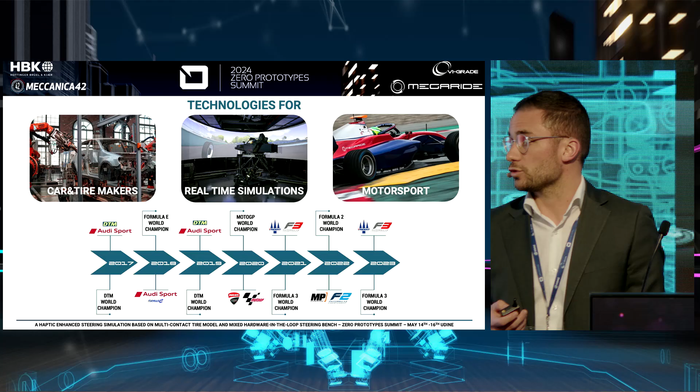First of all, a brief introduction about the companies. Megaride is a University of Naples spin-off company that was born in fall 2016 from the Vehicle Dynamics Research Group. What we do is studying the interaction between the tire and the external environment, reproducing it by means of multi-physical tire models. We provide modular simulation platforms usable for lots of different application fields, supporting car and tire makers to speed up the development and prototypation stage of both tires and vehicle subcomponents. We work in hard real-time simulation platforms such as VI-grade CarRealTime in order to reproduce the real driving feeling.

And as you can see from the timeline below, we have a history of support to motorsport partners with good results, starting from fall 2017, supporting Audi Sport, up to the most recent great result we obtained in Formula 2 and Formula 3 championship.

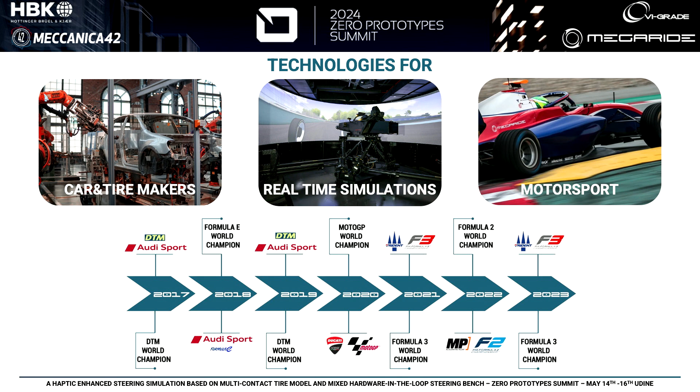Meccanica42 started this activity in 2015 with the aim to expedite and facilitate the introduction of advanced vehicle systems. This is achieved by introducing into the development process advanced hardware-in-the-loop solutions and providing high performance onboard devices.

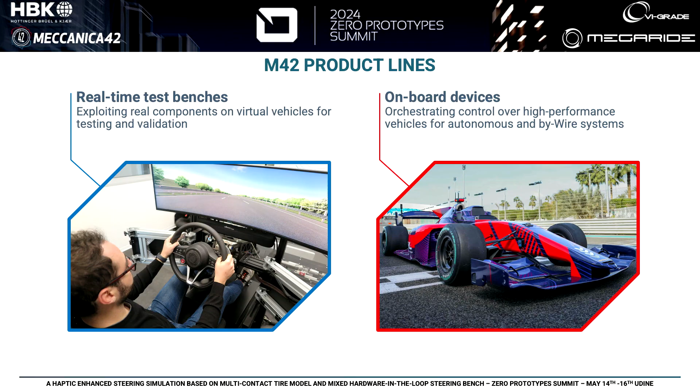The first product line of Meccanica42 is real-time test benches, where we have the possibility to integrate into the simulation loop several vehicle systems and enable integration activities, tuning activities, and also the assessment of other functionalities. While with onboard devices we are capable of controlling and monitoring the vehicle states in real time.

With real-time test benches, we introduce into the simulation loop the steering system and the brake system with the EPSiL and BrakeiL test bench, and also the front ADAS camera with CamiL. All these test benches can be connected both to static and dynamic simulators, thanks to our remotization technologies, especially the SMC, that stands for steering motor cubes, which enables the remotization of the EPSiL test bench.

While with our onboard devices, in particular with the power steer actuator and the corner brake actuator, we are able to control the steering system and the braking system of the vehicle.

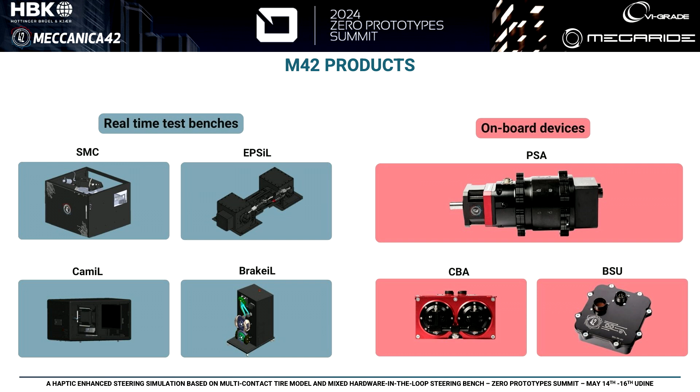Okay, let's move forward to Megaride's multi-physical platform that goes under the name of Ride Suite. When we talk about tire modeling, we used to promote a holistic approach, because all the complex phenomena occurring at the tire road interface are deeply interconnected, interlinked with each other.

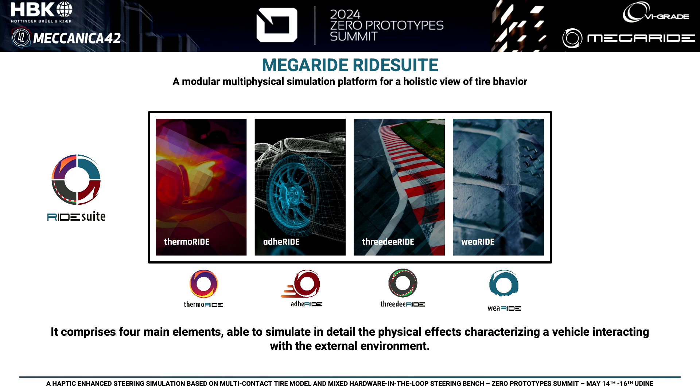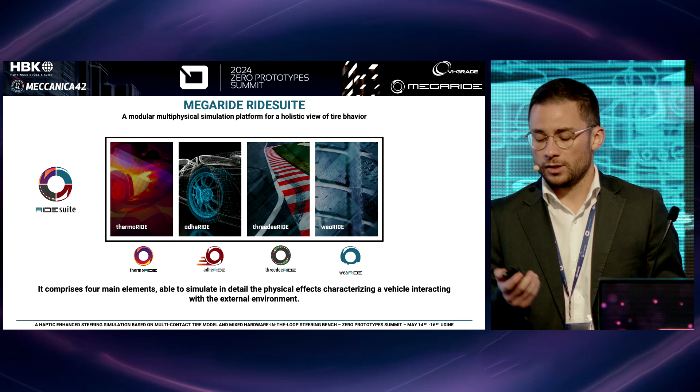This is why Ride Suite was born. It is a modular platform that comprises 4 elements, each of which is able to simulate a specific phenomenon occurring at the tire road interface. So we have a real-time tire thermal model. We have a multi-contact tire model that is the focus of today's presentation.

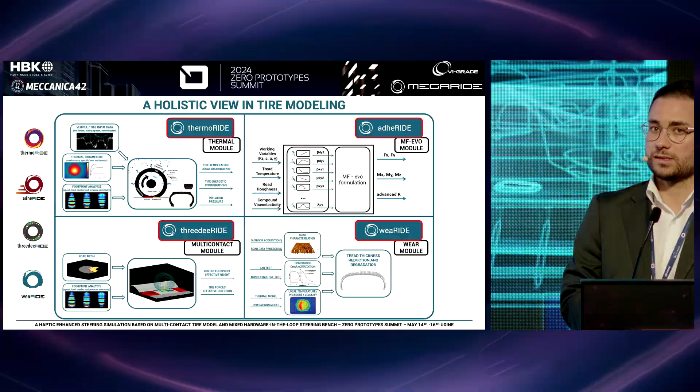We have a wear model able to provide us insights on both the wear abrasive phenomenon and chemical degradation. And finally, we have an MF-based infrastructure that is sensitive not only to standard input of the tire modeling, but also to additional physical information provided by the other modules.

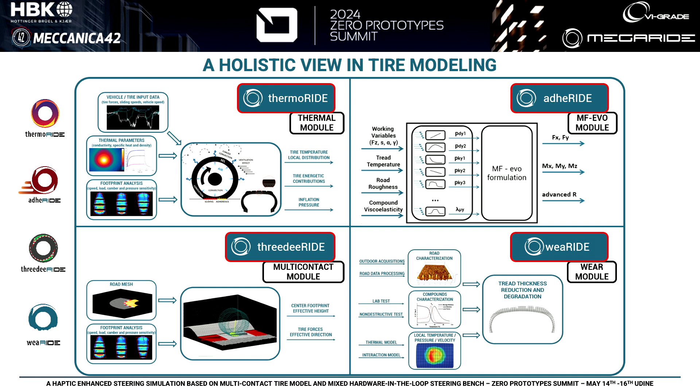The models are easily parameterizable, and we exploit non-destructive characterization to parameterize the model, which can be quickly carried out at our facility at the University of Naples or by means of innovative devices such as the Vesevo, that we have at our booth.

Let's focus on the threedeeRIDE. That is the module of the Ride Suite that is deputed to the reproduction of the real contact between the tire and the road micro and macro asperities, in order to enhance the real contact feeling in hard real-time environment. As we are going to see, thanks to the results we are going to present, it can be demonstrated that we have an improvement not only towards vertical dynamics and thus ride and comfort application, but also from a global haptic point of view, so also handling behavior of the vehicle.

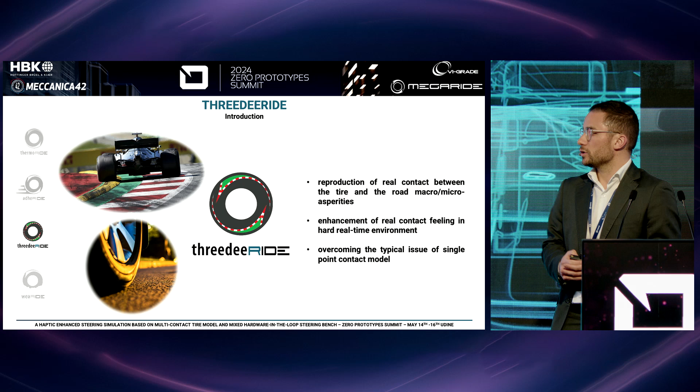The model was thought to overcome the typical issue of the single point contact model, and basically it steps in at the contact patch, where we need to evaluate the right kinematics input for the tangential dynamics module, taking into account the right inclination of the road plane.

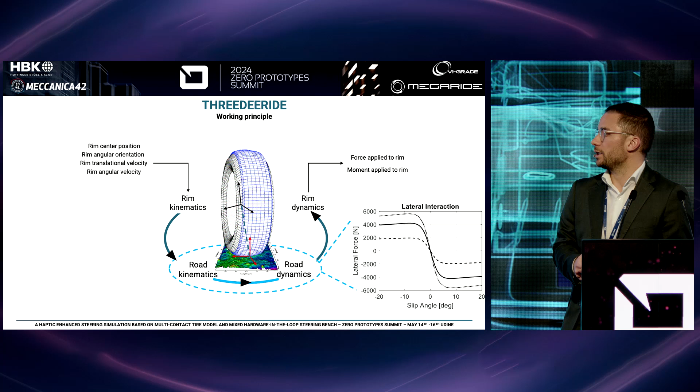Of course, everything is multiphysical, so it is not sensitive only to standard input, but also to the tire thermal state and the wear state. So everything is deeply interconnected at the contact patch.

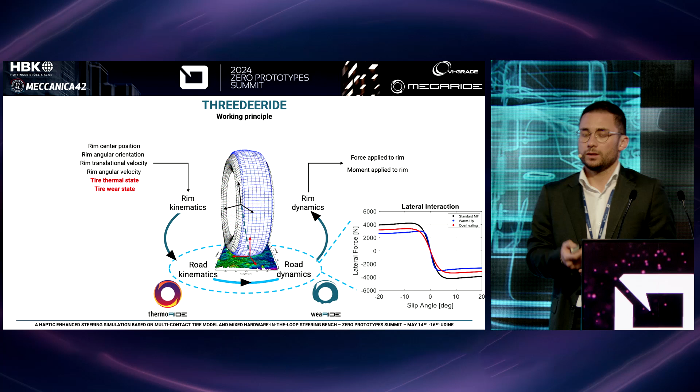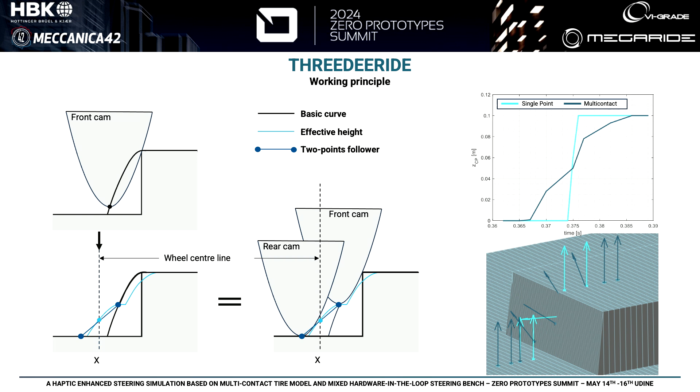From a modeling point of view, the approach to overcome the single point contact is a multi-contact approach that, compared to the single point contact model, generates an instantaneous variation of the center of the contact patch and is able to provide the right direction of force propagation from the contact patch up to the wheel hub. By means of a multi-contact physical model, we correctly reproduce the gradual center of contact patch variation when the tire encounters an irregularity.

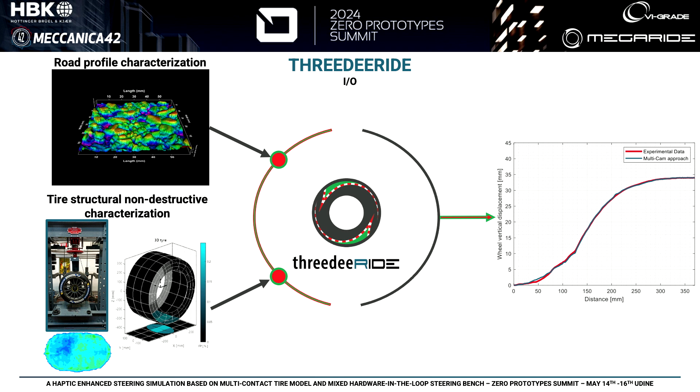From an input/output point of view, we need road profile characterization, since we need to carry the road points, as well as a structural, non-destructive characterization of the tire with specific focus on the contact patch. It's important to model the contact patch correctly using non-destructive methodologies, because according to the position and shape of the contact patch, the cams will change their shape and dimension.

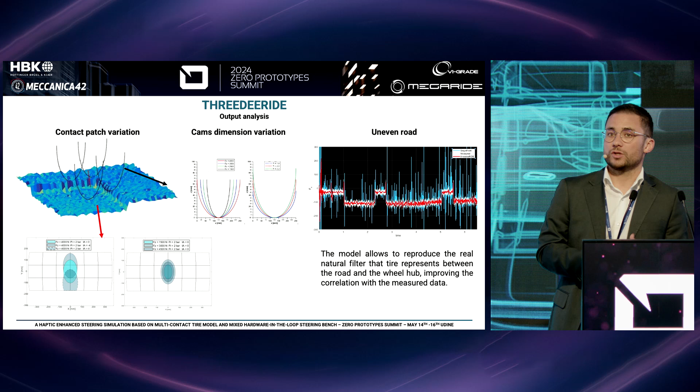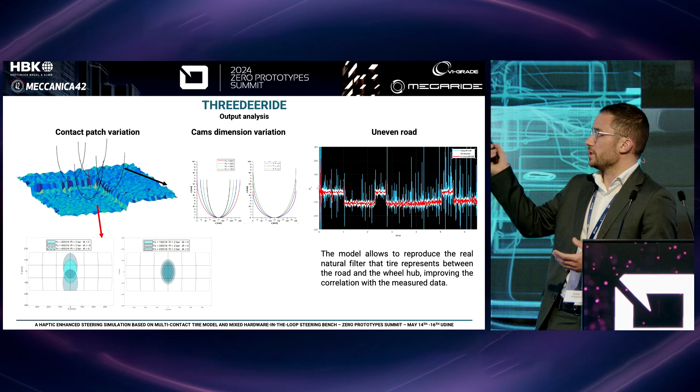The output is a smoother signal that is more in accordance with the experimental data, able to reduce the noise that the single point contact generates, and able to provide the right feeling when moving from a road with certain roughness characteristics to another, or when impacting a macro asperity such as a curb for motorsport applications, or a sidewalk for passenger car applications.

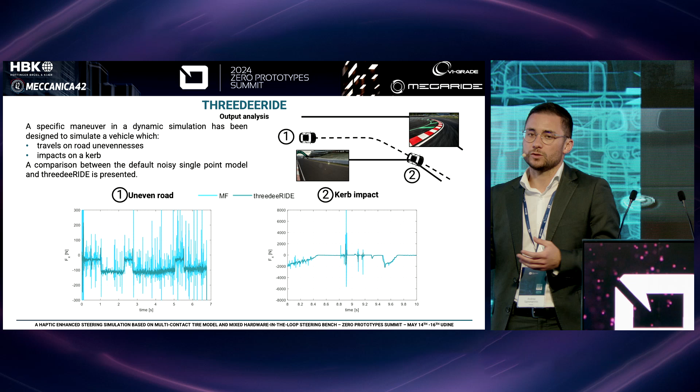Thank you. As we know, the development of modern vehicles heavily relies on driving simulators, enabling a human-centered design process. Due to the high effort required by iterative tuning of modern systems, introducing real hardware into the simulation loop proves to be a winning strategy, both in terms of cost and time savings.

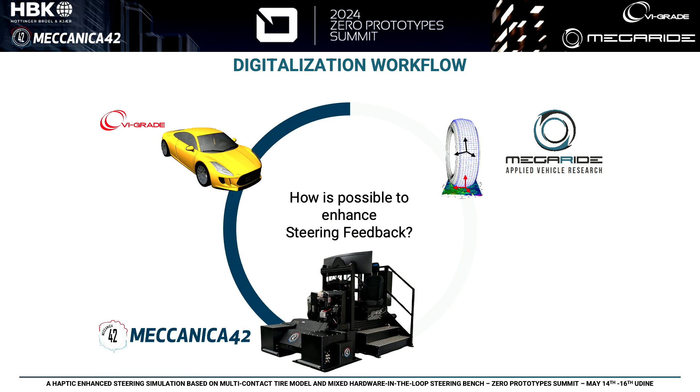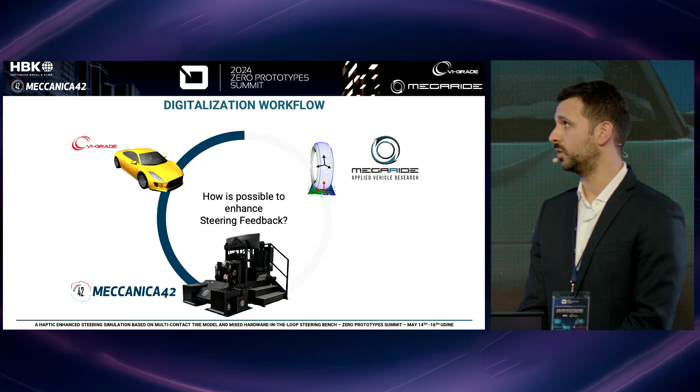Moreover, several recent research studies demonstrate that steering feel, and especially steering wheel torque, plays a pivotal role in subjective vehicle evaluation. So we started to investigate how we can improve steering feedback during simulation, coupling the advantages of our technologies: the VI-grade real-time vehicle model, the tire model and the multi-contact tire model developed by Megaride, and our steering test bench.

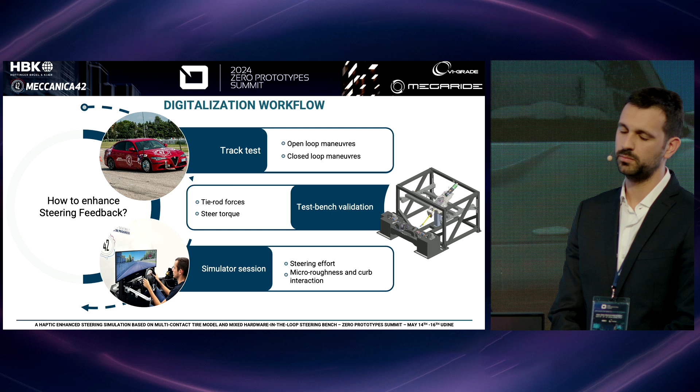We started the activity with track tests, collecting data both for tire model calibration and for test bench validation, which represents the second phase. The aim was to validate and verify the capabilities of the steering test bench to correctly replicate the operating conditions of the steering system. The last phase was a simulator session in which the driver experienced both the single and multi-contact tire models, replicating the same run plan performed during the track test.

The track test session took place at the circuit of Sele, during the Seaside Racing event. This event takes place each year at this circuit, located near Naples, and is mainly promoted by Megaride and the University of Naples. Here each partner shares measurement equipment and collected data in order to promote vehicle research.

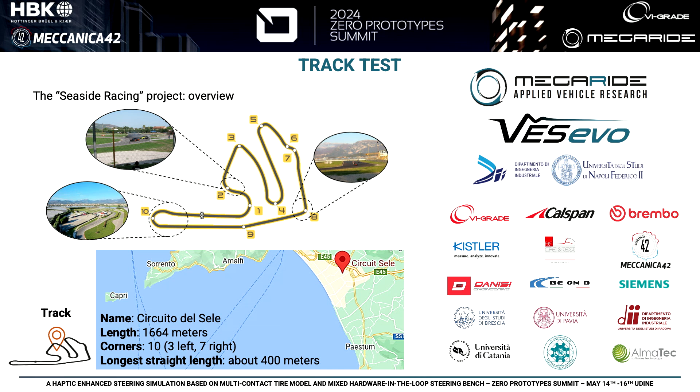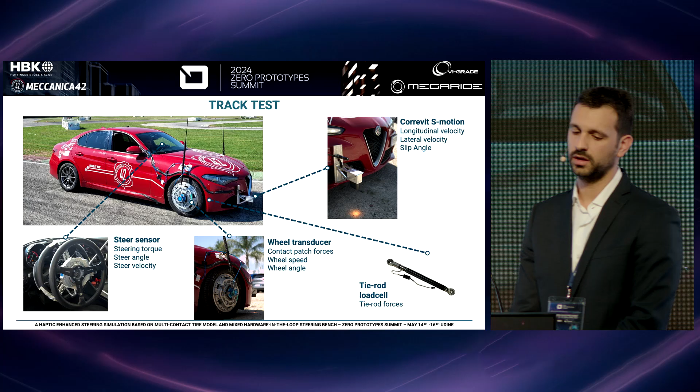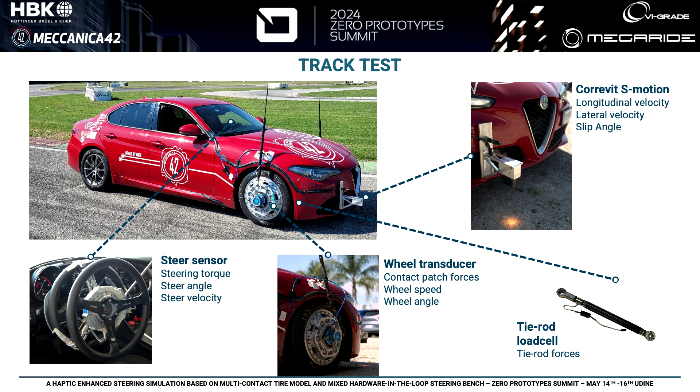During the track test, the research vehicle of Meccanica42 was equipped with a front Correvit S-motion sensor to quantify vehicle velocity and slip angle. The front wheel rims were replaced with wheel transducers to estimate contact patch forces, useful for tire model calibration. We also installed a steer sensor on the steering wheel to quantify steering torque, steering angle and velocity, and applied load cells on the tie rods.

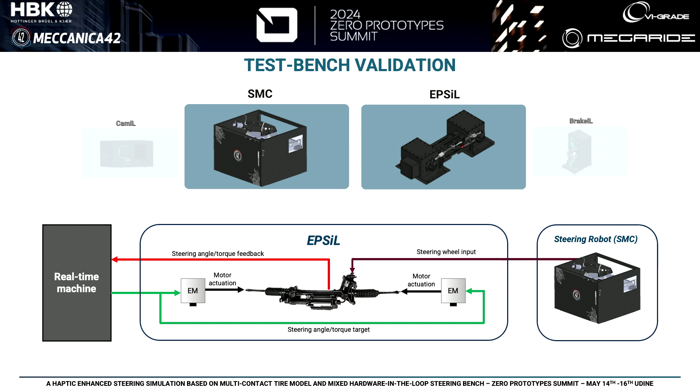The simulation station, for the validation test, is composed of the HiL test bench and the SMC, which consists of a steering robot mounted on a fully adjustable frame to test various geometries. The simulation is executed by the real-time machine, which has two main tasks: first, to generate the CAN messages for the steering control unit, and second, to control the actuators.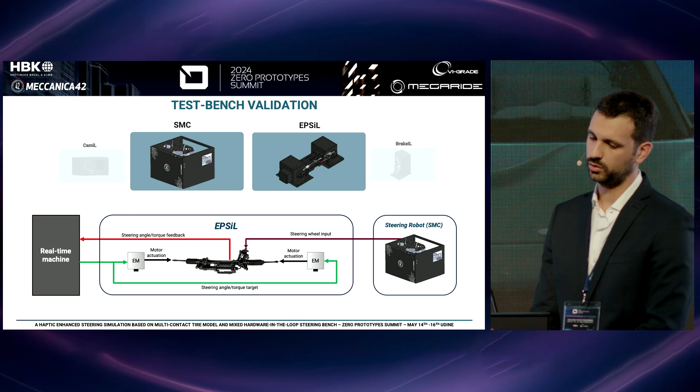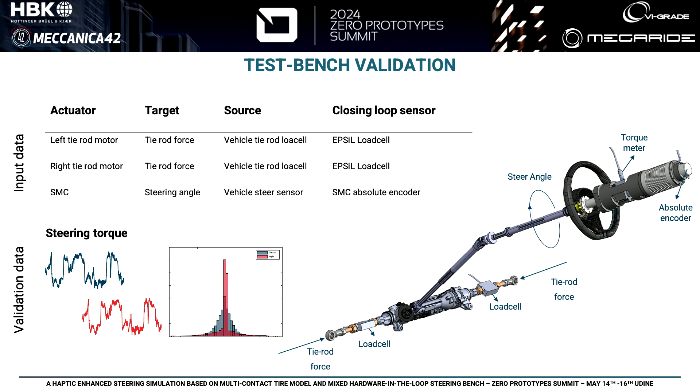We have two actuators that replicate the tie rod forces on the rack, closing the loop on load cells, and a third actuator, the steering robot, that provides the steering wheel input, with feedback closed on the absolute encoder. We took data from the track test—in particular, the load on the two tie rods and the time history of the steering wheel angle. The tie rod loads represent the target for the two torque motors that replicate the forces on the rack, while the steering wheel time history represents the target for the steering robot.

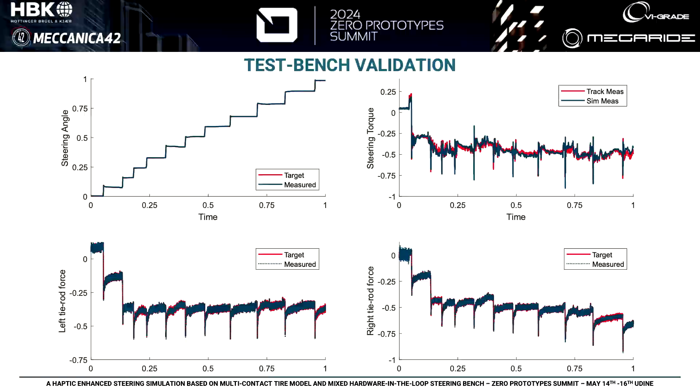In this and the next slide, the red line represents data collected during the track test, while the blue line represents data collected with the simulator. The first test consists of a sequence of low amplitude step steers, comparing targets and measured data for all actuators. On the bottom plot, we compare target tie rod forces with measured ones, and on the top left, the steering wheel angle target versus measured. On the top right is the validation data: the comparison between steering wheel torque collected during the track test and during this validation test.

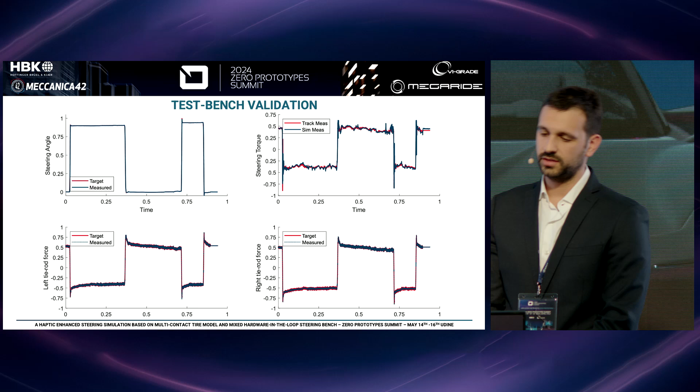The second test is composed of four high amplitude step steers, and again we compare target and measured data. Here it's clear that the three actuators are capable of correctly replicating the target both during transient and steady state conditions.

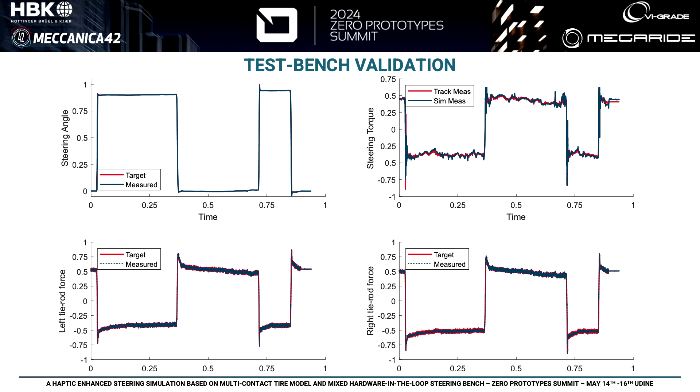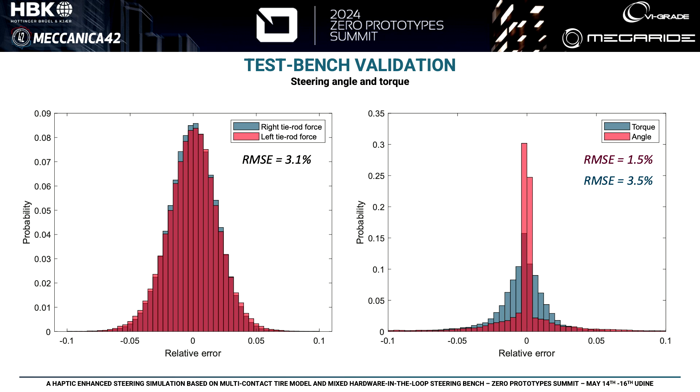Here we have a resume that shows the error distribution for the two tie rod torque motors. On the left, the error is defined as the difference between the target and the actual value, and we can see they have a very similar error distribution. On the right, we have the distribution for the steering wheel torque and the steering wheel angle. We can see that the steering wheel torque has a wider distribution.

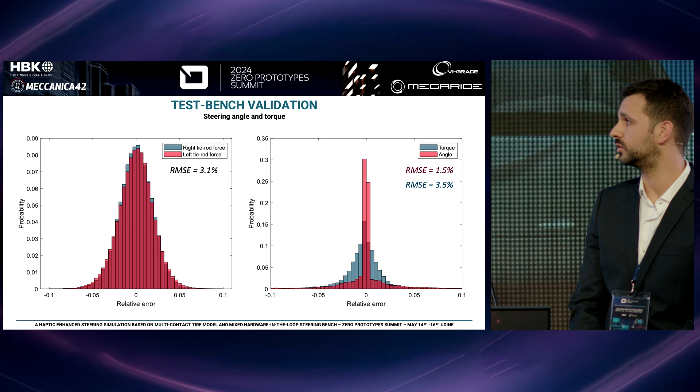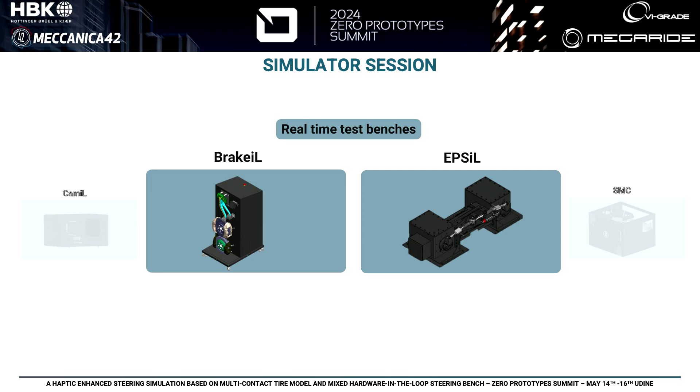This is because the steering wheel torque is the validation data, while the control data for the actuator was the steering wheel angle. So the last step to complete the digitalization and validation process was to carry out a simulator session. In this case, the research vehicle brake unit has been integrated into the simulation loop in order to exactly reproduce the effect of the stock ABS and ESC control logic.

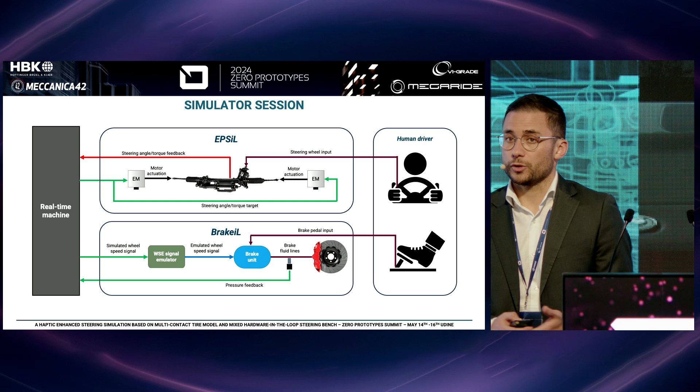With respect to the test bench validation, in this case we exploited the real input coming from the human driver, both from the steering wheel point of view and of course the pedals, so accelerator and brake, throttle and brake. This is why we organized a dedicated test session at Meccanica 42 facilities.

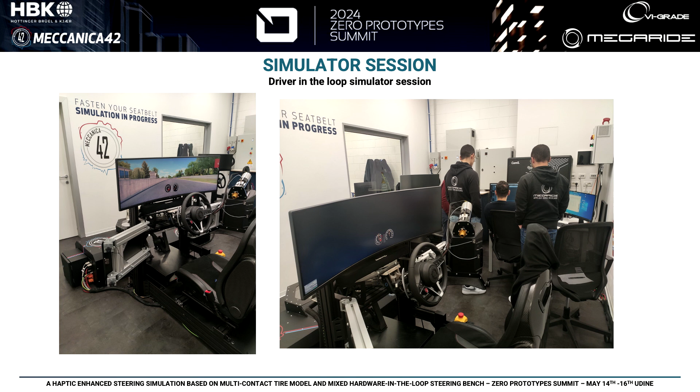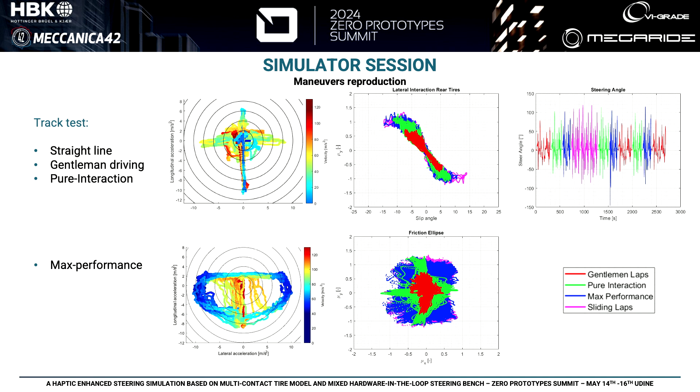We put the same driver who drove the real car at Seaside in the loop at the simulator, reproducing the same maneuvers with the same driving style that we performed on the track. So starting from gentleman driving, going on with pure interaction, up to max performance and sliding laps, in order to explore the widest range of tire-road interaction characteristics and conditions, from low level of slip angle up to the highest possible, both in linear and non-linear zone, and of course in pure and combined interaction.

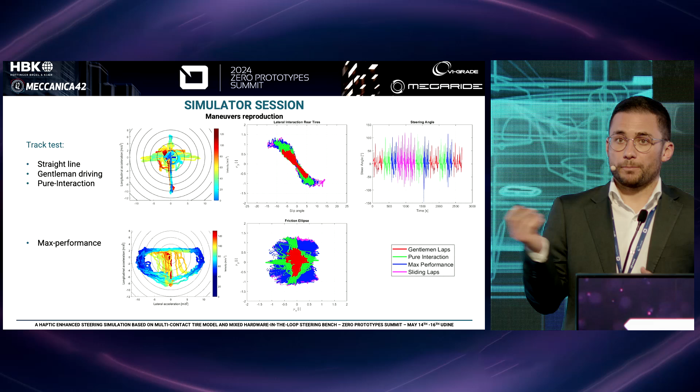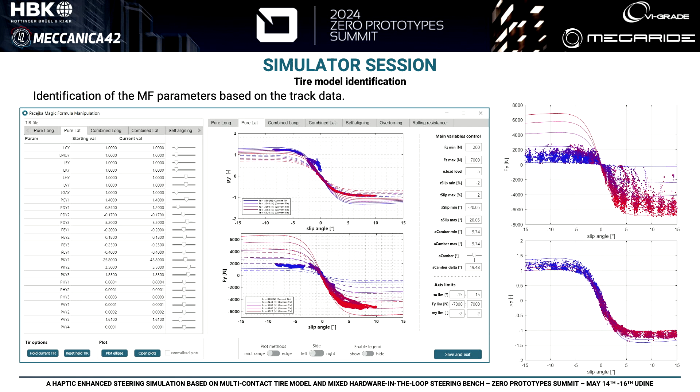The points cloud obtained was useful to identify the tangential dynamic tire model. This can be quickly identified by one of our internal tools, the Ride Lab, which is able to provide information also on the sensitivity towards temperature, pressure, and also wear, which is the distinctive point of our models.

So in the simulation, we put together the 3D ride model with the advanced tangential dynamics model, and we could objectivize the results and the behavior of the vehicle. The interesting thing is that we could couple the objective information coming from the data with the subjective feeling of the driver. So we could improve not only the vertical dynamics behavior, ride and comfort, but also the tangential dynamics behavior. The global handling of the vehicle was improved thanks to this enhanced haptic feeling that the driver reported, thanks to the multi-contact model.

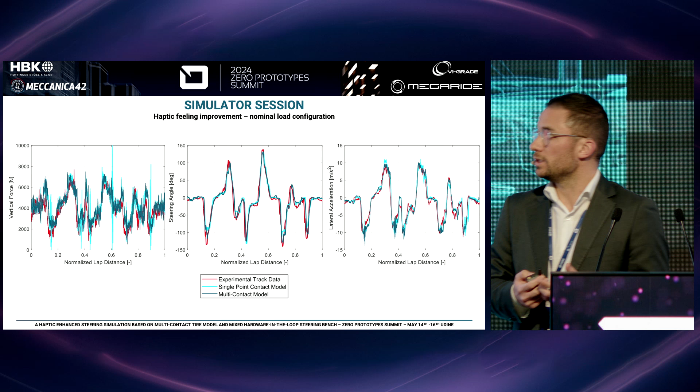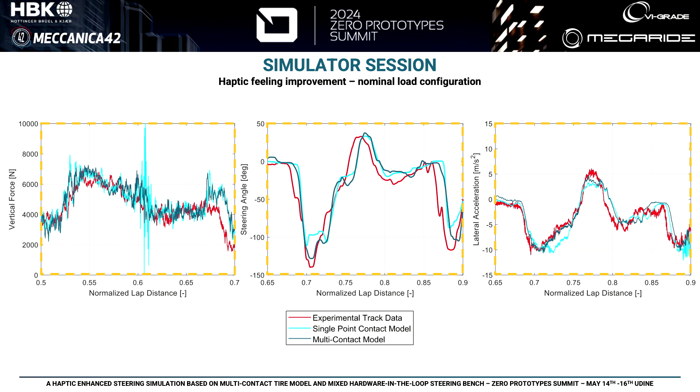The zoom that you see here highlights that by means of a multi-contact, multi-physical tire model, there is improvement in correlation with the experimental data.

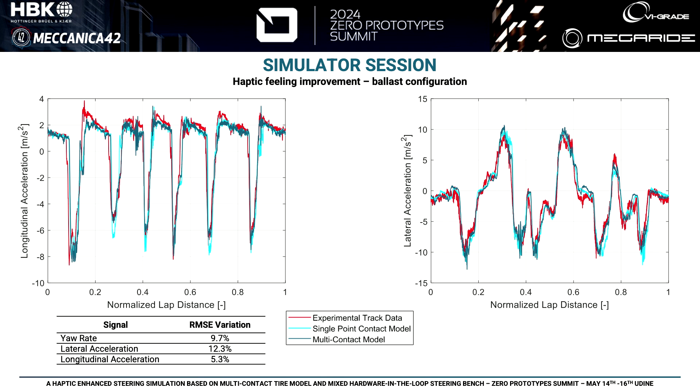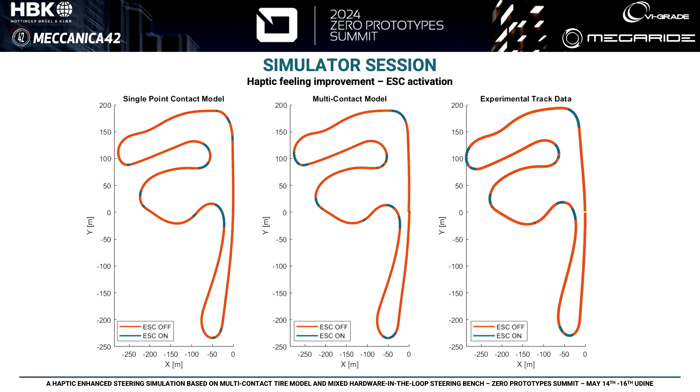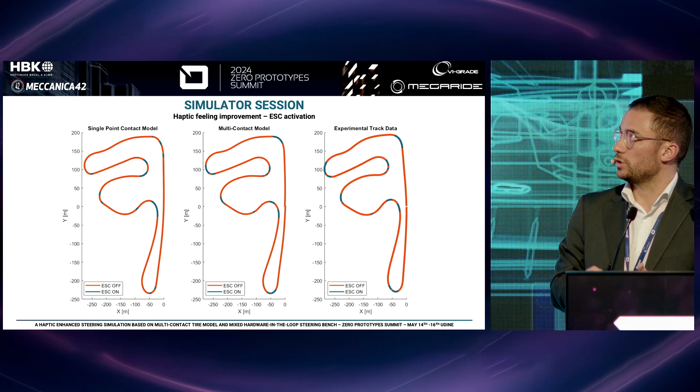Another interesting analysis that we performed was the activation of the ESC. The control logic used at the DIL is exactly the same that the OEM implemented on the real vehicle. As you can see here, also the recovery and the global behavior of the vehicle demonstrated by the ESC activation point is improved. The driver told that this was due to the enhanced interaction and to the enhanced haptic feeling between him and the external environment.

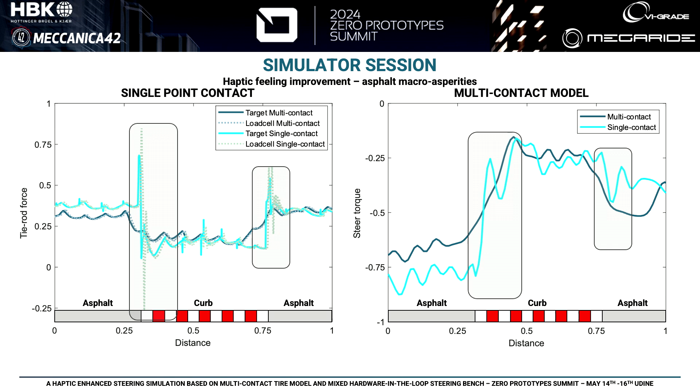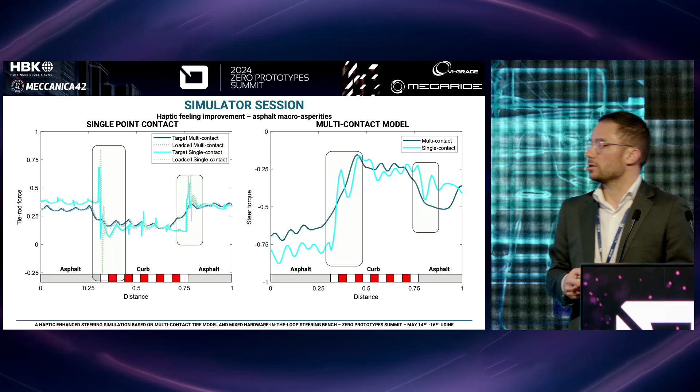Finally, another example of a crucial point: the transition between the asphalt and the curb, and again the asphalt. As you can see here, with the single point contact model, both the target and the load cell are characterized by a spiky signal due to the single point contact model approach, whereas with the multi-contact tire model, we are able to generate a gradual variation of both the tie rod and steer torque, which makes all the difference in the global feeling of the driver when going from the asphalt to the curb and again back to the asphalt.

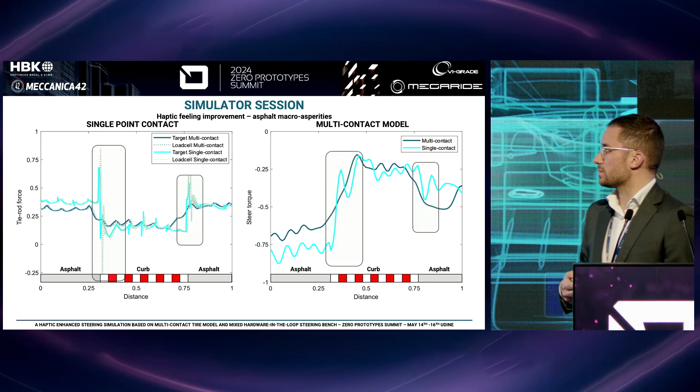So here you see the instantaneous variation of this quantity, whereas with the multi-contact tire model, everything is more smooth, gradual, and realistic.

So just to sum up, we could demonstrate with this application that we could improve the haptic feeling of the driver, so we could improve the general perception of the interaction between the tire and the external environment. So the perception of the interaction between the tire and the road, not only from a ride comfort point of view, but also from a global vehicle behavior point of view.

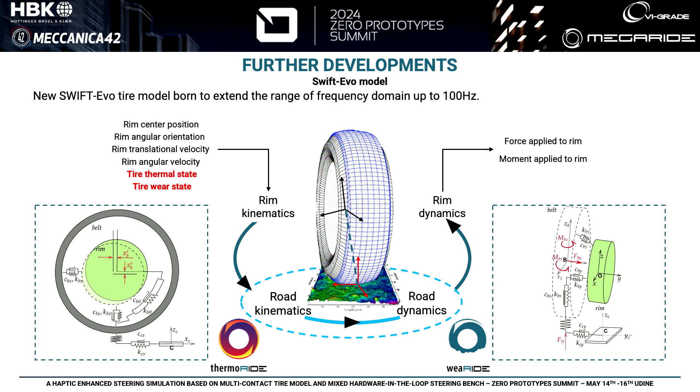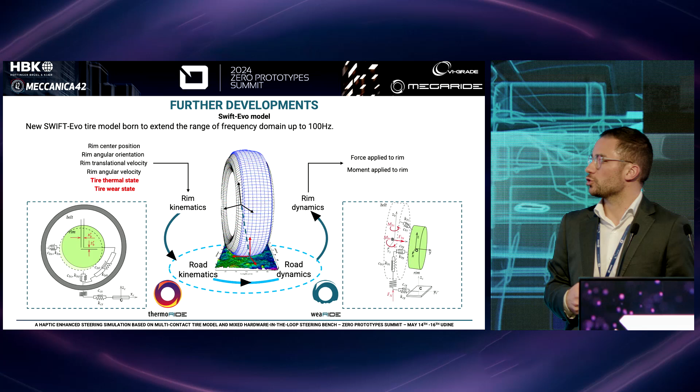And of course, we want to add another step. We want to add a Swift Evo modeling to the 3D ride coupling. This new model that came out in RideSuite V24 with the 3D ride model, in order to extend the range of validity of the frequency domain up to 100 hertz. Of course, we expect improvement also in this case, both for ride comfort application and handling point of view.